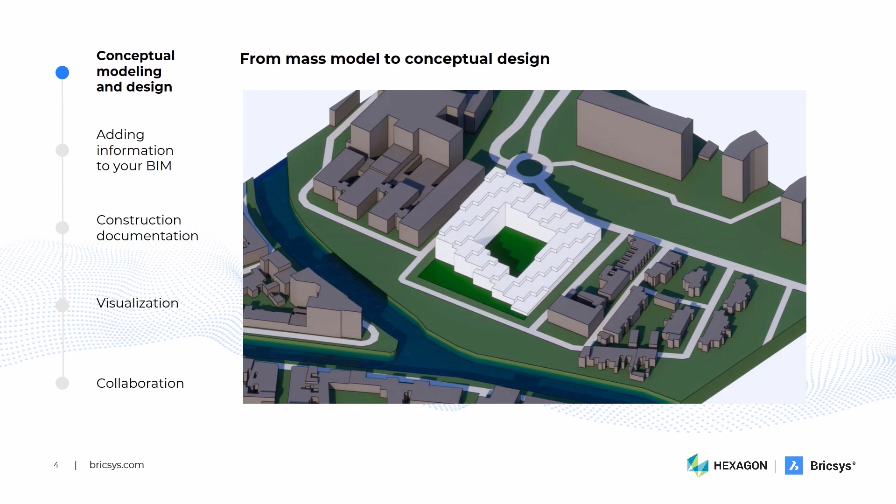In the first part of our presentation, we will explain how in BricsCAD BIM you start with sculpting your conceptual design. Conceptual design is where we convert our ideas into a massing model to help us understand the project from a 3D massing view. Unlike traditional BIM tools, you can use intuitive push-pull direct modeling combined with parametric modeling, which is not limited by predefined parts or libraries of components. As a result, you can experience design freedom in a full 3D BIM workflow that will feed immediately into the BIM later in the process.

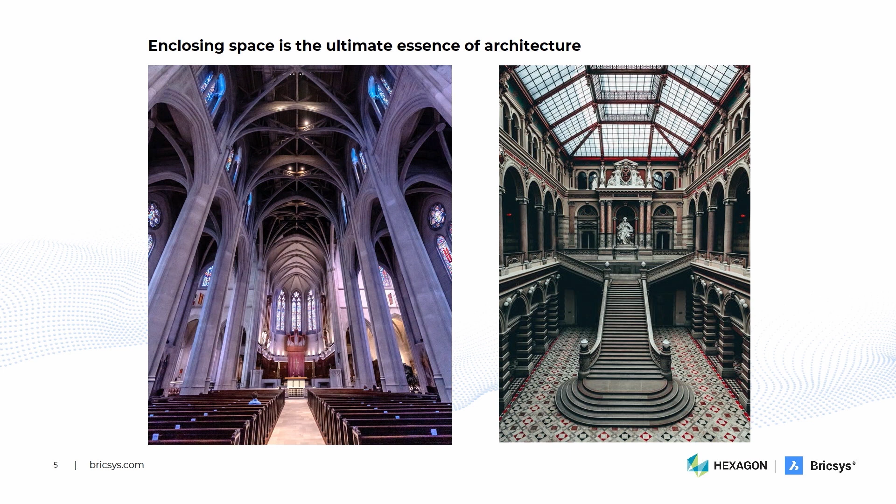An important aspect of the conceptual design are spaces. And let's hear from Miklos Svet, product manager at Bricsys, how you can work with spaces using a direct modeling approach. Thank you, Timon. Enclosing space is the ultimate essence of architecture. Many stakeholders associated with the building throughout its life cycle rely on spatial information. Architects, MEP engineers, contractors, and facility managers alike. Consequently, spaces must become the backbone of a new generation BIM software.

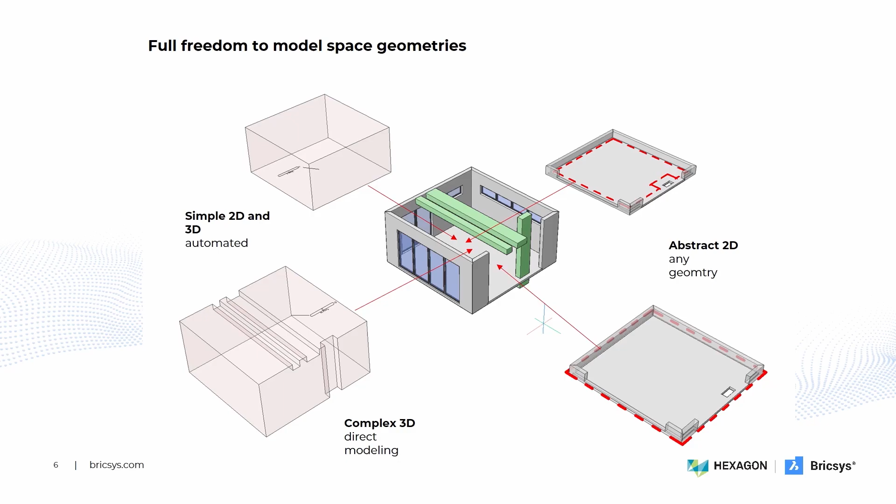At Bricsys, we believe that users of a software need to have unlimited freedom to model any spatial geometry, just like how they can model any building element. Therefore, our spaces can be simple 3D volumes or very complex ones, or even 2D abstractions. In addition to spaces, we also introduce story and building spatial elements in a hierarchical, IFC-compatible data structure. Spatial elements in BricsCAD BIM V21 feature many industry-first standout solutions. For example, generative building and spatial element authoring with the help of artificial intelligence, also known as quick building. Check it out. Thank you, Miklos.

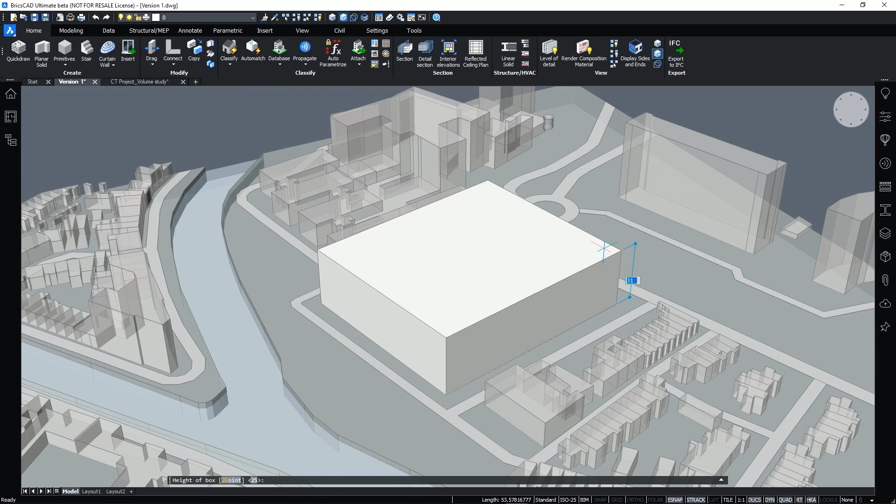Let's show what this massing workflow looks like. We can start sculpting 3D volumes to create the shape of the building that we have in mind. Jacob, can you explain to us how you create the initial shape of the building? Yeah, so here I'm basically starting from a very simple box and using direct modeling tools such as extrude, push-pull, or by rotating faces. I am able to sculpt my way to an interesting design that works well with the project context.

So here I am simply rotating faces, and I'm using the manipulator to help me with this process. Here I'm repeating the same process again to turn this model into a slightly more dynamic shape. Now, of course, next to direct modeling, it's also possible to use tools like, for example, scripting. Here I can use a Lisp routine that will slice this solid into equal cells in the X, Y, and Z direction.

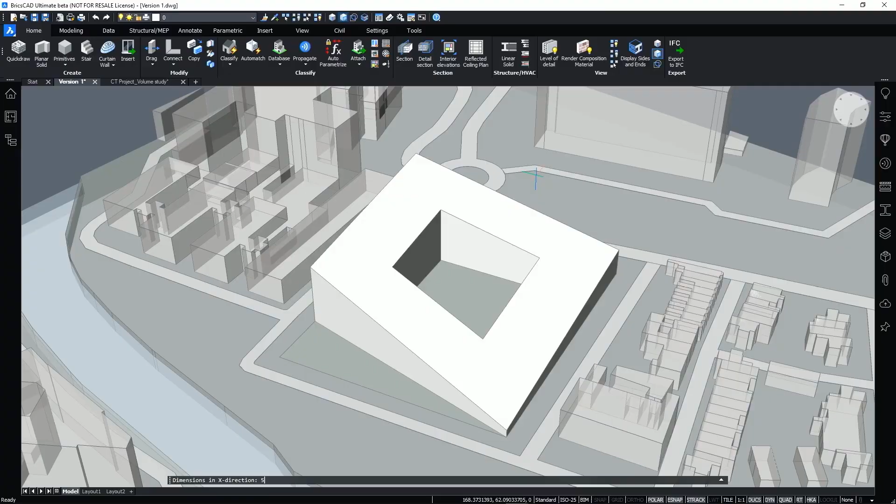And of course, there are different ways to achieve this massing model or to create different volume studies. For example, you can import the geometry of the 3D volume from another tool or use our Grasshopper connection to create it in a parametric way. In BricsCAD, you can work with native geometry or imported geometry in exactly the same way with no limitations.

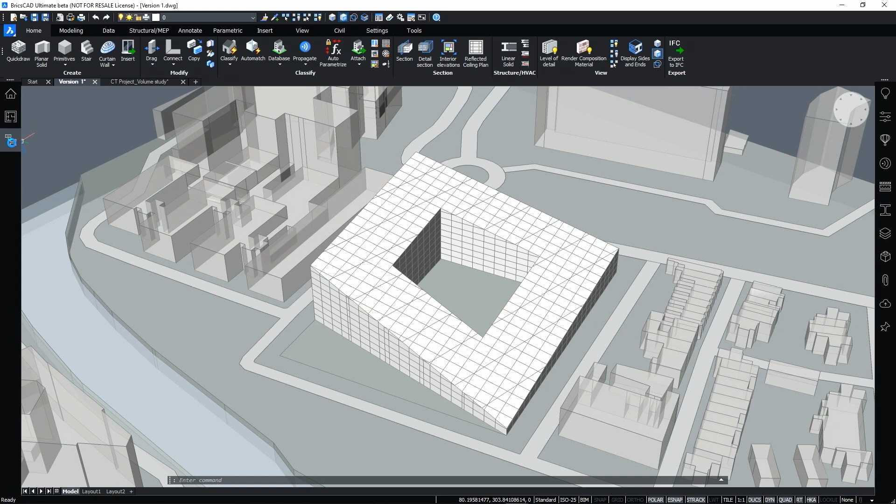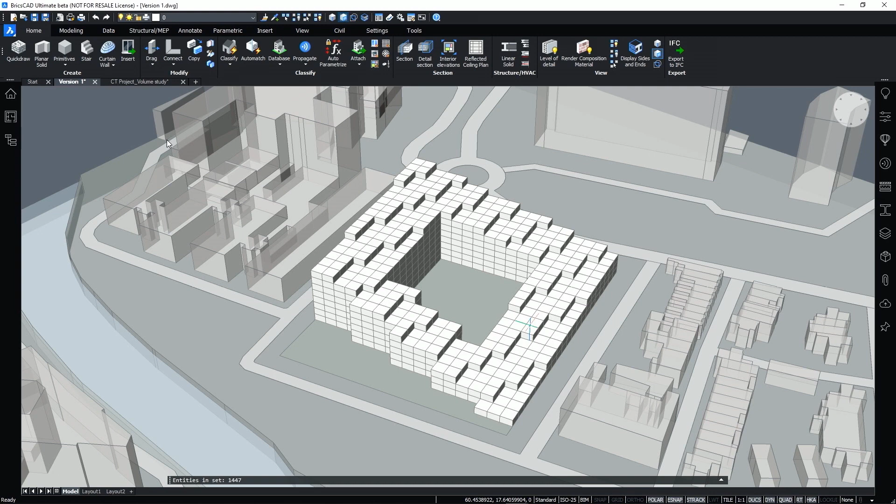We can now use the structure tree to see that the cells which are created by the slicing algorithm are sorted by volume. So we can remove the cells with the smallest volumes to get rid of the partially sliced cells to achieve the shape that we have in mind. In this way, you can quickly create multiple volume studies, as you can see from the alternatives in this DWG model. And now, let's show a first example of automation.

We're going to use a tool called Quick Building to transform our massing volume into an LOD200 model automatically. Quick Building will shell the mass volume, and it will automatically create walls, slabs, and spatial elements like spaces, buildings, and stories. We can create a section plane to have a look inside the building. And we can indeed see that instead of a mass model, we have created walls and slabs. We can also go to the structure tree and isolate some of the slabs to see how the model was created.

In this way, it is not only possible to compare design alternatives in a geometrical way, but also compare them using different derived quantities. As part of BricsCAD V21, we have introduced a new quantity framework that allows users to create configurable user-defined quantities. We have prepared some quantities up front, but of course it's also possible to create your own quantities using expressions like sum, max, or min.

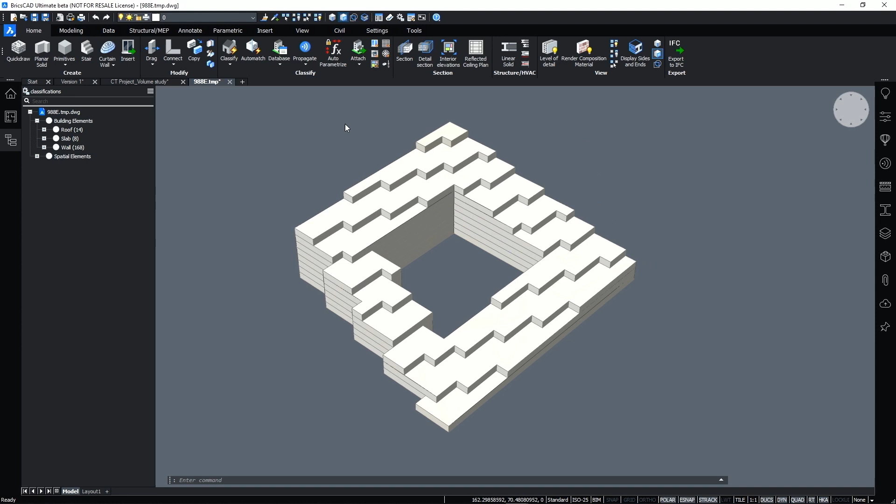In this case, we are going to create a quantity for the compactness of the building. This can be calculated using an expression that divides the volume over the total surface area of our building shape. These kind of quantities can now be used downstream in the process, for example, for quantity takeoff, IFC export, or you can see them in the properties panel here on the right.

What we have shown is a workflow to convert a mass model into a conceptual design model, with walls, slabs, and spatial elements. This can be used for evaluating design options, not only geometrically, but also with regards to quantities like compactness or floor-to-site ratio.

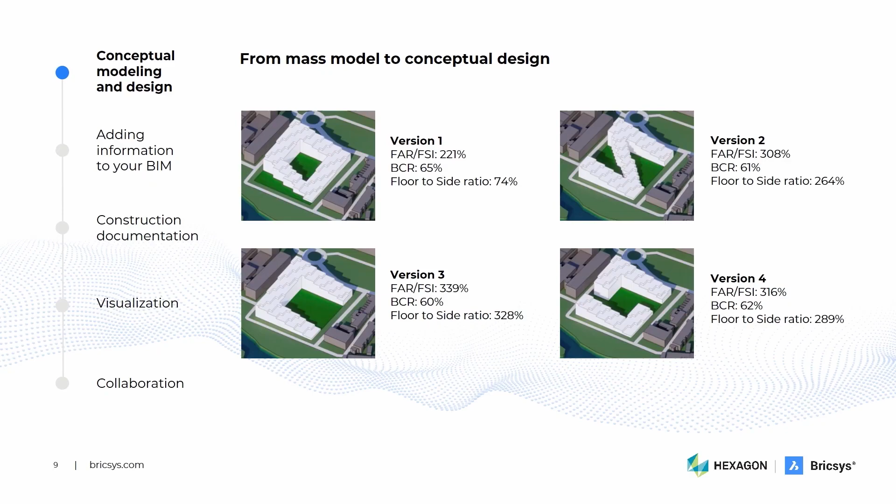In the next demo, we want to demonstrate a scan-to-BIM workflow, where you can create a conceptual design model starting from a scanned point cloud. This is often the case in a renovation context. Last year at the Bricsys conference, we announced a multi-year initiative to advance our scan-to-BIM technology in cooperation with our partners HOK and Leica Geosystems. Our partners from HOK have delivered industry guidance that is helping us to create a solution that is able to handle large reality capture projects. And let's see what this workflow looks like in BricsCAD V21.

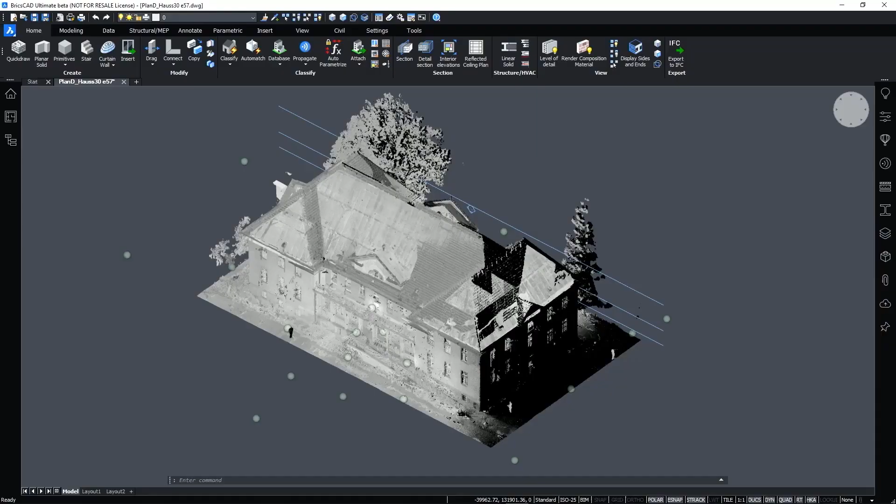We start here from an existing large point cloud of 98 gigabytes after processing of the point cloud. As you can see, the performance of this huge model is still very good. We can activate a section to have a look inside the point cloud, where we can see some of the bubbles. These bubbles are locations where the scan was taken. And we can click on such a bubble to see the exact scan that was taken from that position.

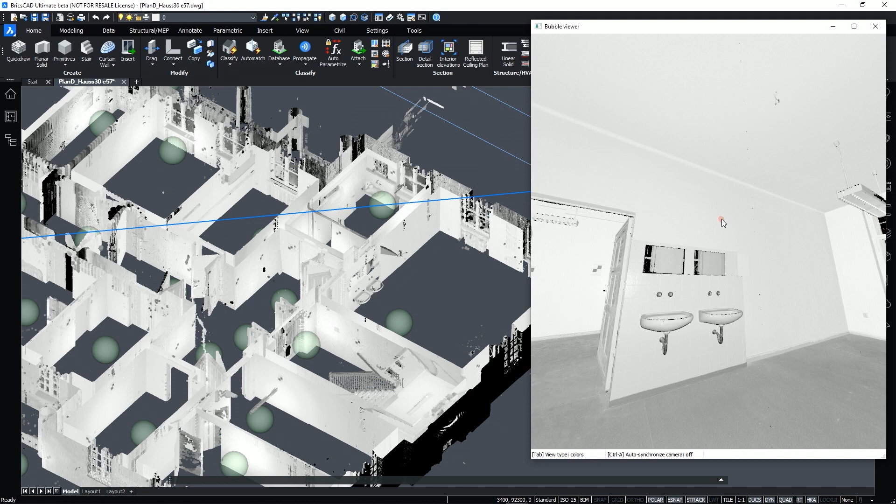From this bubble view, smart algorithms help the user to generate the 3D geometry she wants in one single click. And it also gives you feedback on deviations from the ideal model. Other algorithms later on can be used to straighten the model if needed. We can see that Jacob is now creating multiple planar surfaces to create the exact position of the room, which can then be used for further modeling. Afterwards, we can use our native direct modeling tools like BIM Connect to finish the geometry of this room.

Next to surfaces, it is also possible to detect solids, for example walls or slabs or columns, from the point cloud data. We can do this by choosing one point from where the solid should be created. What we are actually showing here is a semi-automatic workflow to create geometry from the point cloud that can be used later on to continue modeling or to convert them to intelligent BIM elements, as we will demonstrate in the next part of our presentation.

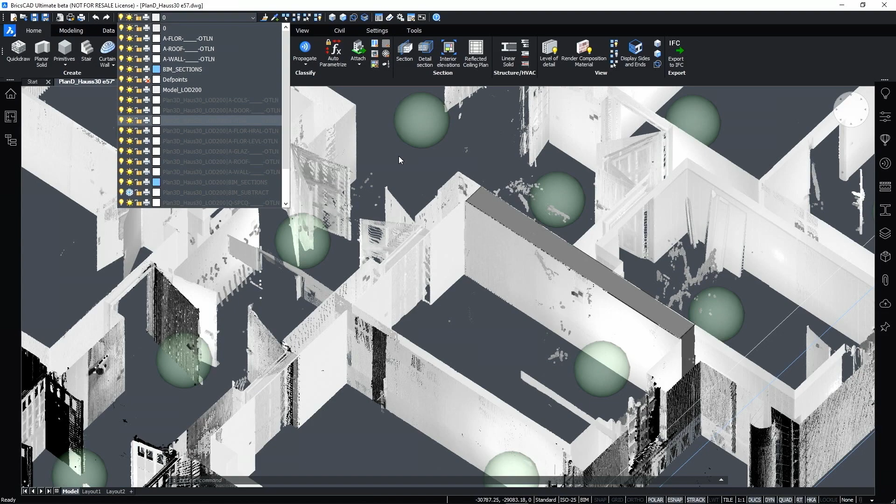In a similar way, we can continue to build the model until we have finished an LOD200 model of the scanned building. As a result, we have a hybrid model of the point cloud combined with the geometry in the same DWG file. In the next part of our presentation, we will develop our concept model into a full information-rich BIM. BricsCAD BIM leverages the power of artificial intelligence to automatically convert your concept study model to a fully classified BIM.

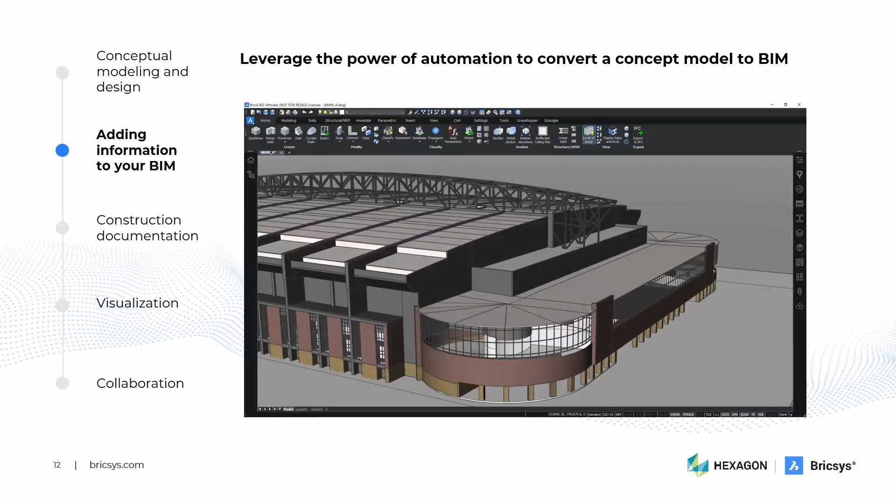Let's first hear from Greg Schleusner, a design technology director at HOK, how Bricsys works together with industry partners like HOK to advance our future roadmap. When we started working with Bricsys, we chose an existing project to reverse engineer, i.e., take a project we've already built, designed in other platforms, and rebuild that and use that as the basis of our work. So last year you saw the model reconstructed. This year you're going to see it used in demos.

One of the main areas we focused on was drawing automation, and specifically we started with something like fire life safety, which is a lot of effort. So you can see here these kind of drawings are really laborious to produce, and so that was the basis of the collaboration. We think this way of working is a perfect process to go back and forth, to use the work that we've already done, and help engage and add to the development of Bricsys.

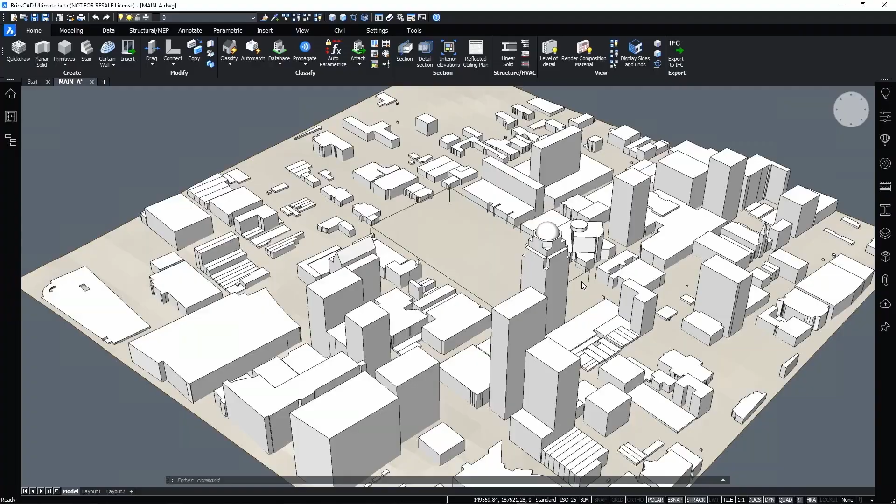The first and foremost challenge with working with this kind of large-scale projects is, of course, performance. Our strategy to handle big models is very simple and straightforward, namely to split it up into smaller parts. It is plain common sense. You don't want to wait until the last duct or sofa on the 20th floor is rendered to check something on the second floor. You just open that model as if the rest didn't exist.

Still, a large project remains a large project, and all these separate models are combined into one master model, which is often slow to open and handle when it contains a lot of large models. To address this, in BricsCAD V21, we have introduced background loading of XREFs. As you could see, we could open the large model in just a second, while all the nested submodels are being loaded in the background.

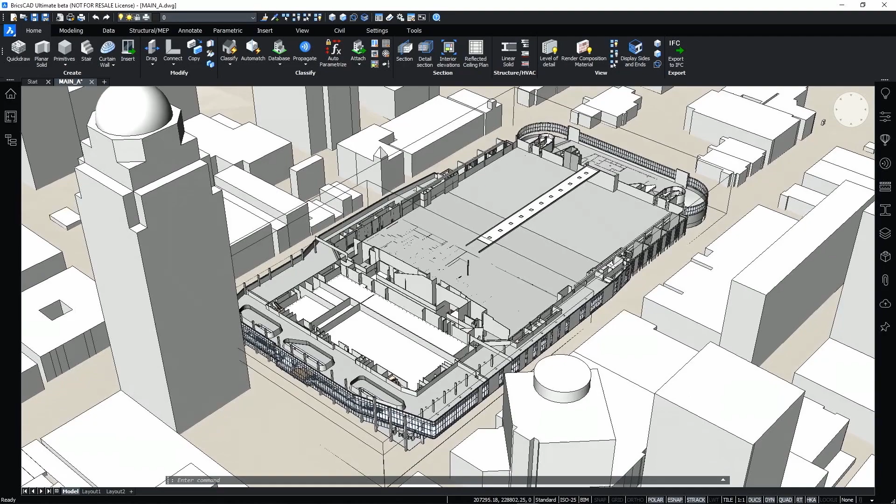Independent of the size and complexity of these XREFs, the master model opens instantly. The overall structure is displayed in low detail, while multiple processor cores are working in the background to load and render the XREFs in full detail. The XREFs show more detail as soon as it's ready, but before that you can already start inspecting data like the building and story information, or you can navigate through the project to that one XREF that you search for and open it up.

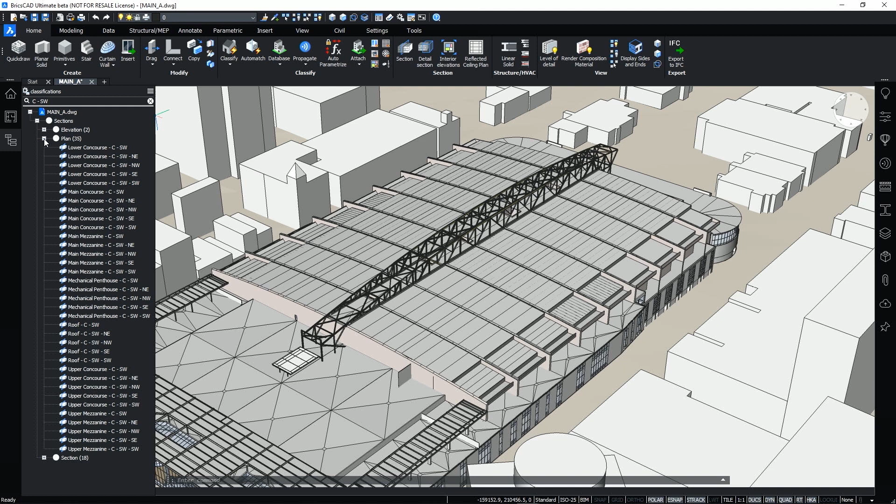Now that the entire model is ready, we will focus on a smaller part, namely the main mezzanine in the southwest part of the building, to show how we go from a geometric model to a BIM using our artificial intelligence tools. Let's open this model as a separate DWG file. If we open the structure tree in this model, we can see that it contains 515 solids. Now we want to convert these solids into information-rich BIM entities like walls and slabs and columns. This would be a lot of manual work, and this is where a new example of automation comes in.

BIMify is a tool to automatically classify these solids. It is based on machine learning algorithms that were trained on a large database of BIM models, and as such, BIMify is able to detect BIM types based on geometric attributes of the solids. BIMify will now start scanning the entire model to classify all the entities and also to detect buildings and stories and spaces. The goal here is that BIMify does the majority of the work, but as a designer, you can still overrule or change the classifications manually.

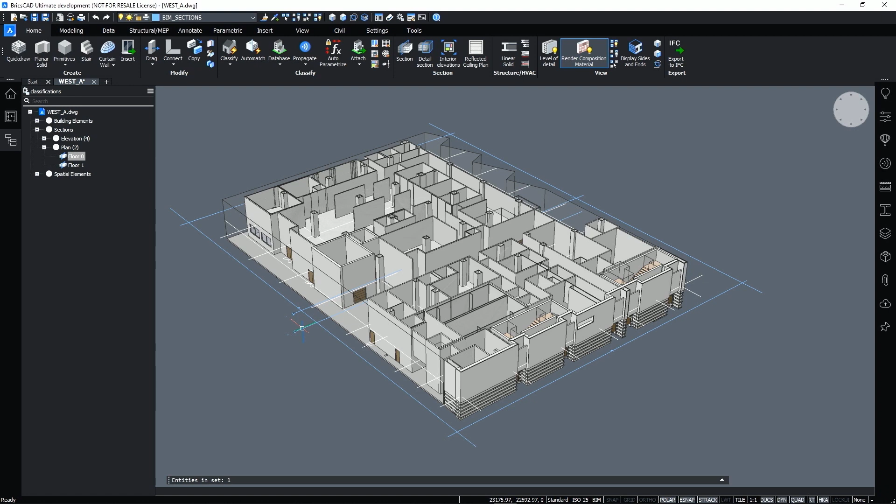For example, in the structure tree, we can see that there are building elements being classified. If we select them, we can see that, in fact, these are furnishing elements. So we can select these entities, we can go to the quad, and we can reclassify them as furnishing elements. Also from the structure tree, we can isolate, for example, the walls to see how the model is structured. And we can indeed see that BIMify has done a good job in classifying the walls.

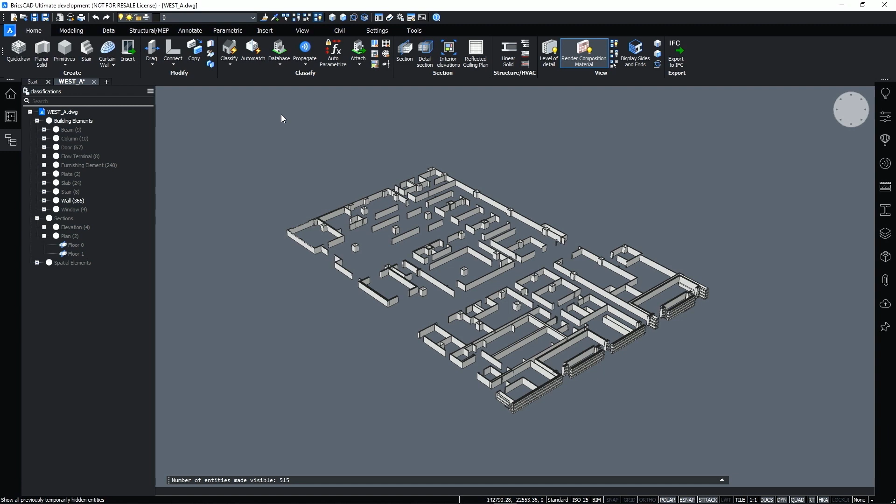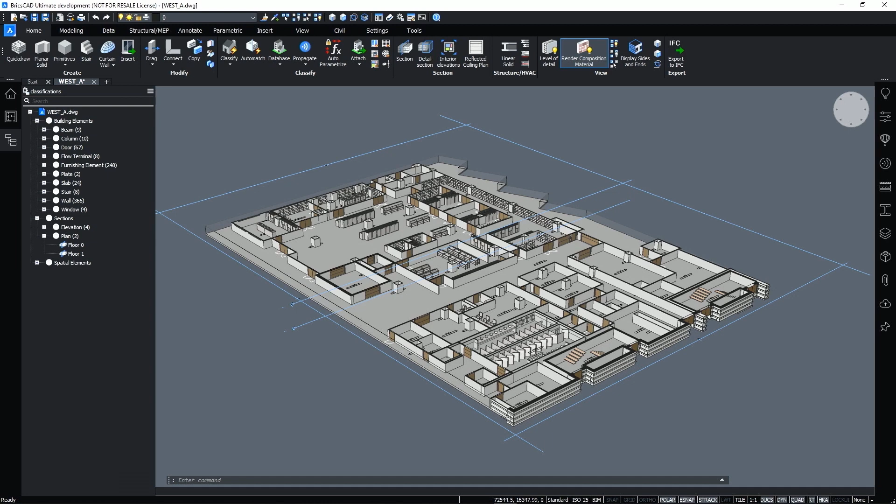Jakob, can you now explain to us how we can create and work with the new spaces in BricsCAD BIM V21? So other than classifying objects according to their IFC classifications, BIMify also automatically created spaces in the model. So it automatically found all of the enclosed spaces, enclosed by architectural elements such as walls, slabs, columns, and created space objects for these. So you can see this here in the structure browser. I have here my spatial elements.

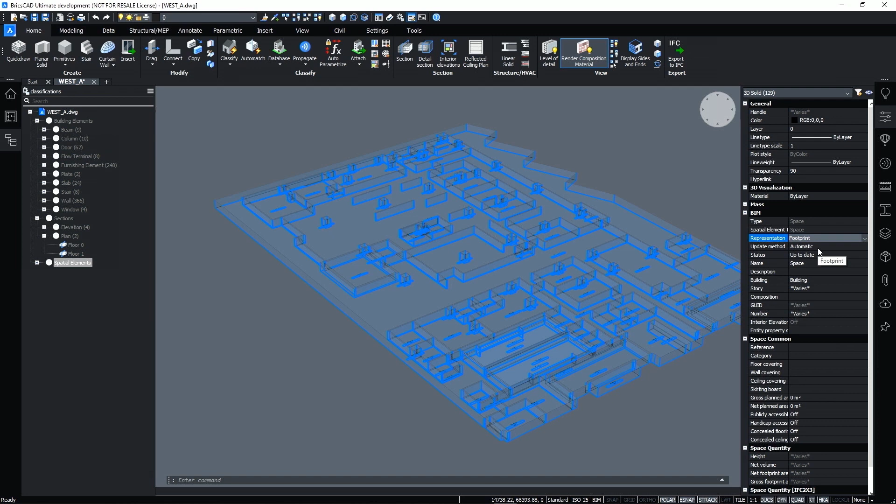Let me just isolate them. And you'll see that they're actually solid objects. So they're represented by solids. I can also represent them by, for example, footprints. So let me change their representation to footprint. This way, your model will be a bit less cluttered, and you can get a very clear overview of where the spaces in your model are.

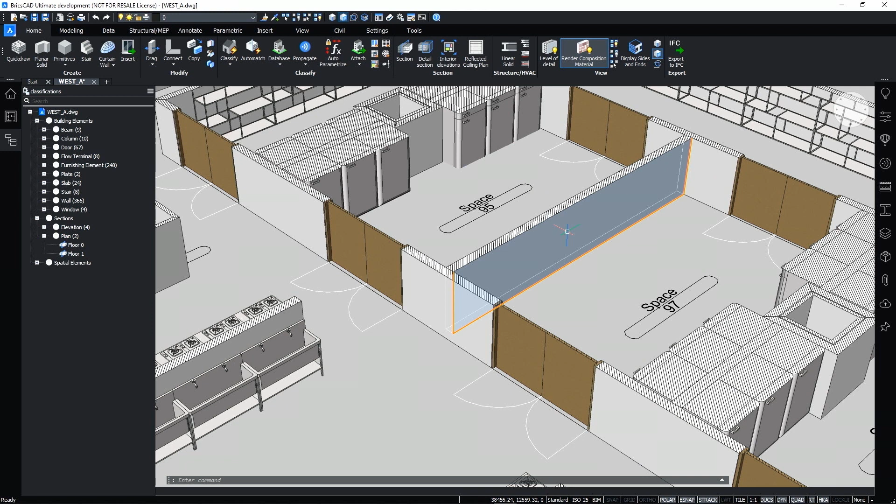Of course, these spaces are also still linked to their enclosing entities, which means that, for example, if I would move a wall, let's say I move this wall here, you will notice as soon as I complete this operation that my two adjacent spaces here will be flagged as out of date. So you see this little exclamation mark. I can simply choose to update it automatically, and it will adapt to the new situation.

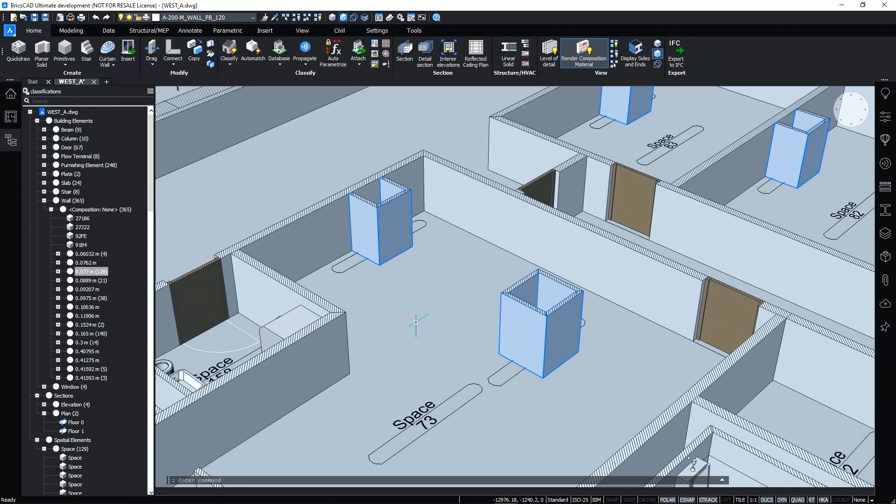In order to increase the level of development of this model further, we can also start adding compositions to the walls and the slabs. For example, in this model, we can see several coverings for the structural columns. These coverings can serve as a fire casing. From the classifications tree, we can easily select all the coverings, and we can apply a composition by drag and drop from the composition panel.

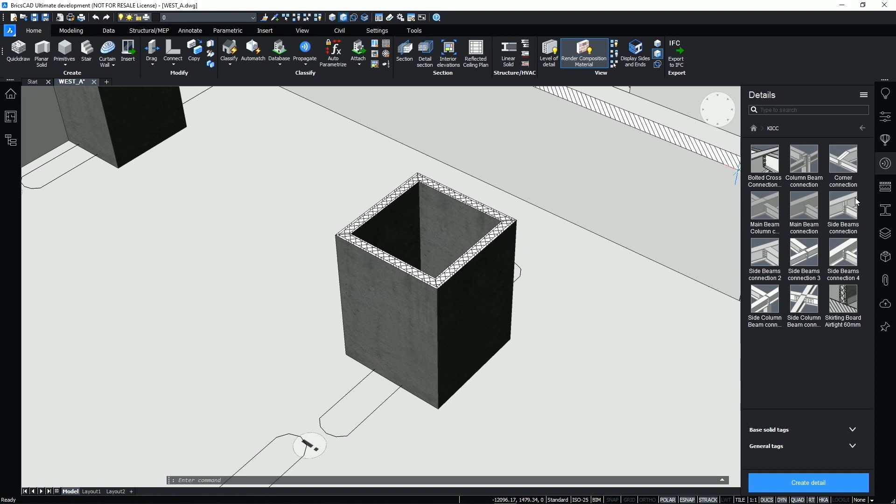After this is done, we can increase the LOD even more by applying details from our detail library. In this case, we want to apply a skirting board detail to the column coverings. This will improve the airtightness, but also serve as a protection for heavy objects. We can do this by drag and drop of the detail, and this will propagate the detail throughout the model.

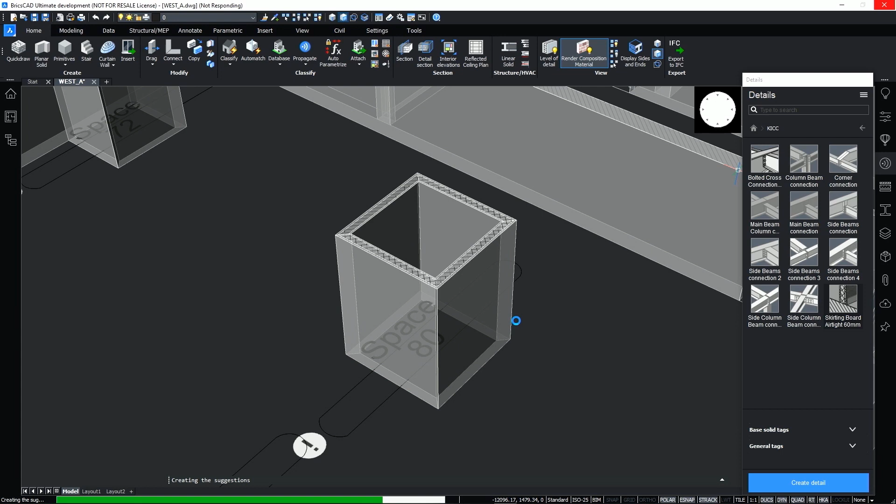This means that it will scan and find all possible applications of a detail in the entire model by trying to find the exact same situations in the model where this detail can be applied. This saves you a lot of time, and it allows you to increase the level of development in the model consistently, not only in one single place.

In this case, 128 applications were found, and we can manually select the indicators to choose whether to keep or ignore these details. So as a designer, you still have full control. If we accept the changes, the geometric applications are applied directly to the solids in all the detected places.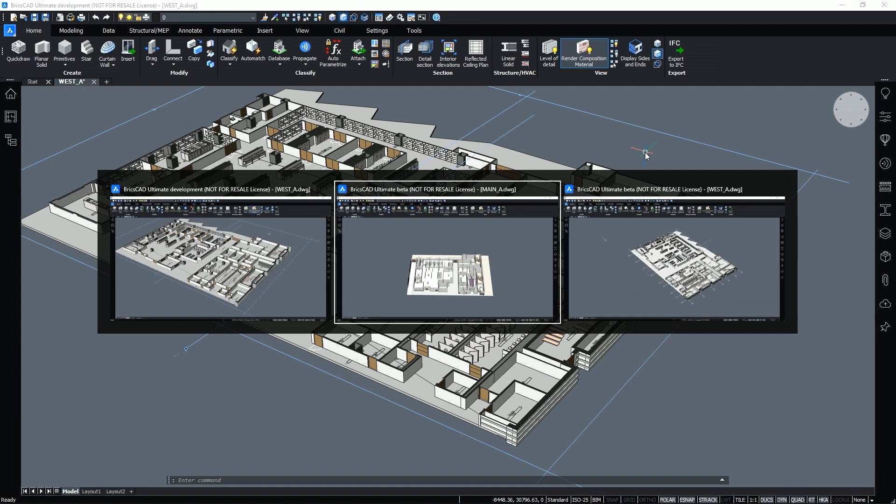As a next step of automation, it is possible to use scripting in Python, which has a very high-level and intuitive syntax for usage in BIM, without needing a lot of development background. For example, in this model, we are interested to see some key numbers about the model, like the occupancy of the rooms or the different areas of the different types of rooms. Using Python scripting, we can easily visualize this data using one of the many Python libraries that are available.

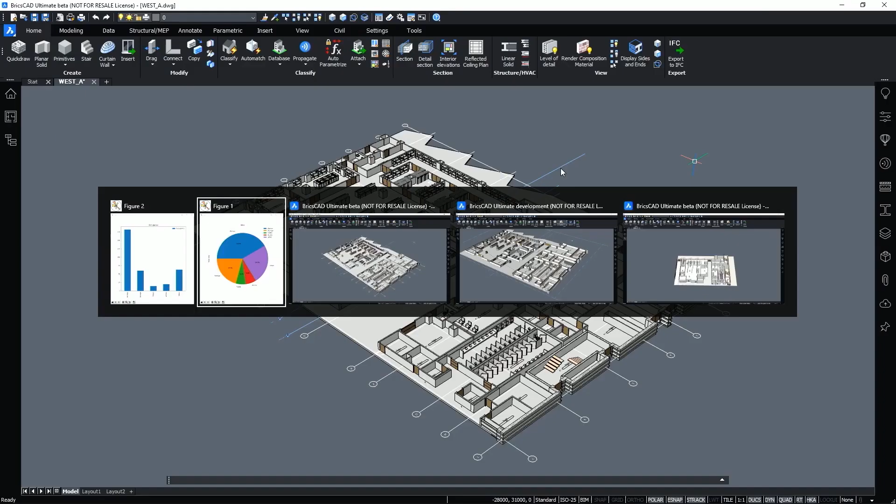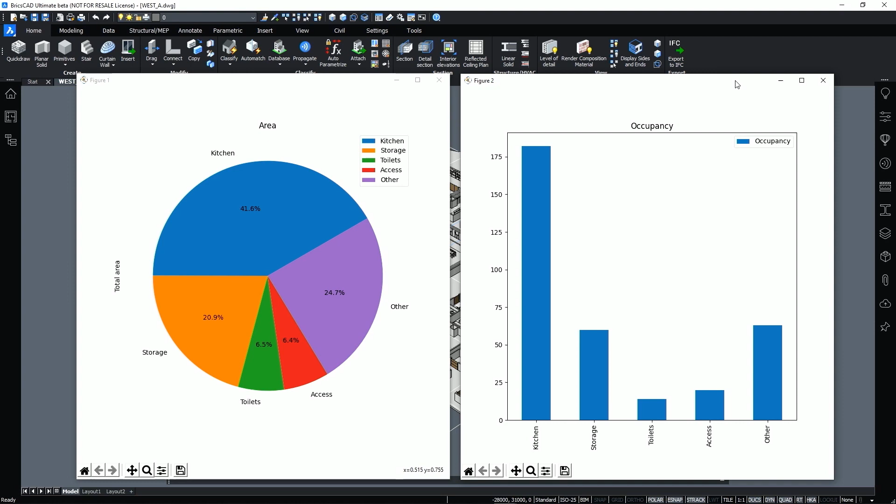For example, here we can see the results of the area and the occupancy analysis shown in real time from the BIM session, which gives us a lot of insights into how the model works. In this demo, we used a lot of artificial intelligence to automate tedious parts in the BIM workflow. Jürgen, who's a technical lead at the AI and R&D team, will now explain the vision for using artificial intelligence in BIM. Jürgen? Thank you, Tim.

You could say that about 80% of the time spent on a BIM project goes to labor-intensive, repetitive work, while only 20% is spent on actual design work. Think about all the BIM data that needs to be added to the model, about recreating details over and over again, and about annotating and perfecting all generated drawings. That is why our team focuses on the creation of intelligent design assistance tools that automate these repetitive tasks and give more time to the architect or designer to focus on what really matters, the design and the problem solving.

We've already released a number of solutions that assist in creating a BIM model. You just saw examples of Quickdraw, of BIMify and Propagate, but we also see opportunities for other improvements. Drawing generation, for instance, is something that typically still takes a lot of manual work to get exactly right. And another interesting idea is the automatic checking of design requirements on your models. And of course, if you have one particularly hated bottleneck in your workflows, you can always let us know, and then we'll have a look at it.

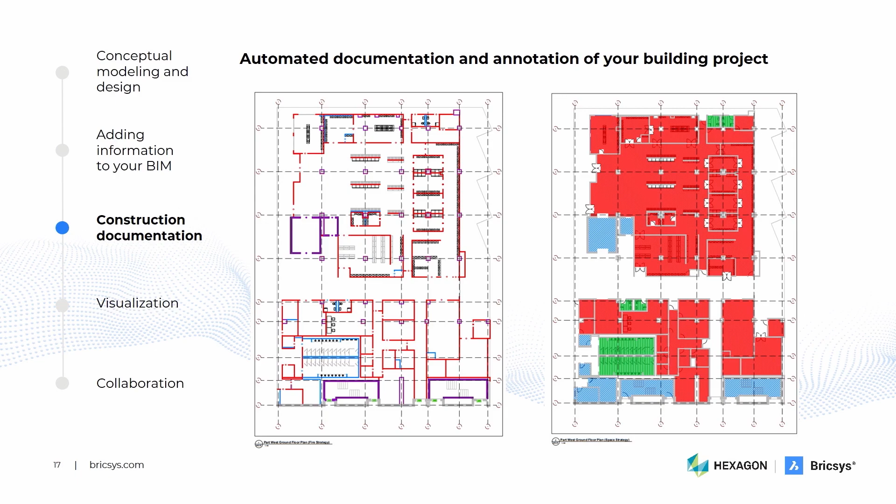The next step in our workflow is to create the construction drawings that are incorporated in the tender documentation and the contract documents for construction works. Creating the documentation for a building project is often the most laborious and error-prone part of the architect's building design workflow.

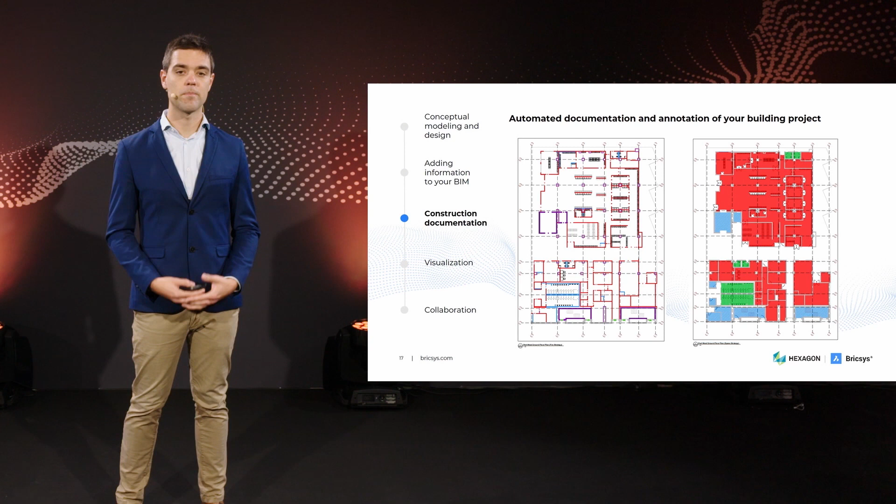Our goal is to create clear and accurate construction documentation and give the user complete control on how the 2D drawings will look, including automation of tag placements and drawing customizations. Then, these automatically created sheets can be freely annotated and dimensioned using the 2D drafting tools that are available natively in DWG, while the drawing views stay in sync with the 3D model.

Peter, a product manager at Bricsys, will now explain how the project browser can be used to create and manage your construction documents. Peter? In BricsCAD BIM, the center of everything is a 3D model, created and manipulated using direct modeling. So the BIM is not built up from floor plans and elevations, but it is the other way around.

The 2D is generated from 3D by calculating cross-sections and hidden line removal through the 3D objects. The resulting 2D line models are stored in separate DWG files, which can be edited using the standard toolkit for 2D drafting. And they are grouped using sheet sets.

With the BricsCAD BIM project browser, in a couple clicks you can create a sheet set filled with hundreds of sheets, all using your company standard title blocks, page setups, plotter configurations, and naming convention. Floor plans, sections, elevations, and details are automatically laid out on the sheets.

You can even create multiple sheet sets for different phases in the project or for different drawing representation types. Adding more sheets to your project will not make the 3D model or any of the individual sheets bigger or slower to open up or handle. Let's have a look how that works.

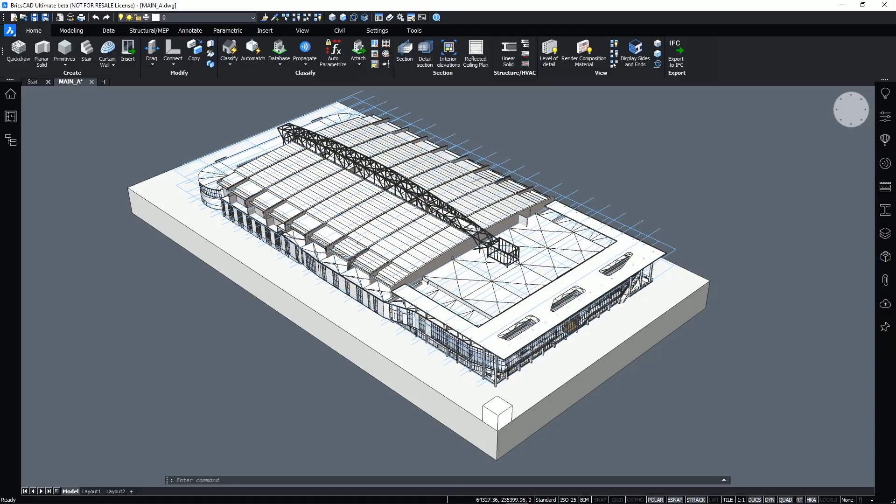Thank you. So we start here from the master model of the Kentucky Convention Center. To generate the plans of this large building, section volumes were made that represent only a smaller portion of the model. These section volumes cut through different XREFs of the master and can be used both for checking the 3D model, but they are also the basis to generate the construction documents.

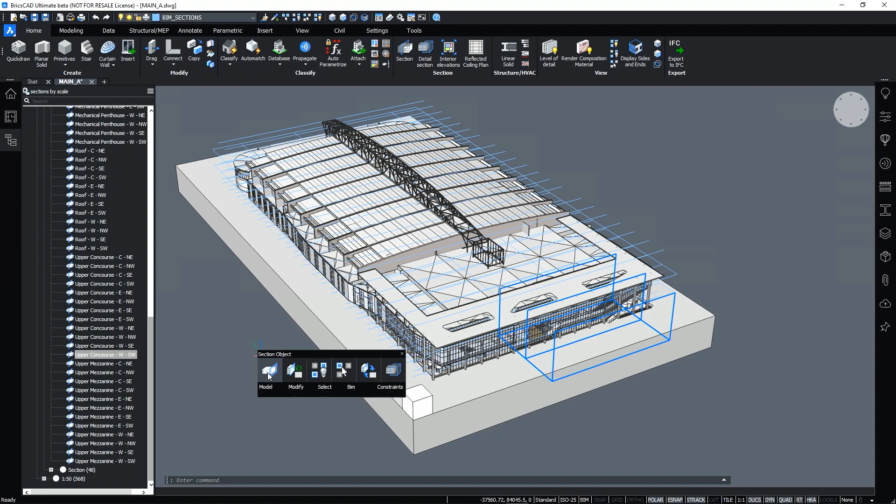Elevations and vertical sections were constructed in a similar manner, and as a result, the entire model contains more than 700 section volumes. Let's isolate one section volume that we will work on. As Peter explained to us before, the 2D views are stored in separate drawings linked to the model, which we can open from the project browser.

The project browser gives us a full overview of all the sections and sheets and models that are part of the BIM project. From here, we can open a sheet that was generated up front to show what it looks like, including view labels, title blocks, and grids. A large set of sections still needs to be placed on the sheets here.

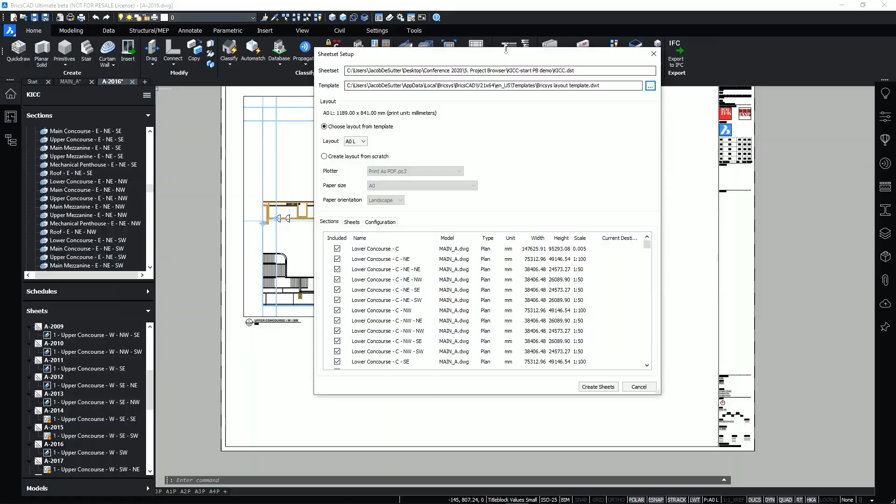So Jacob will now show us how you can configure the sheet set layout to create all the sheets that we need for the construction documents. So in the sheet set setup, we can navigate through all of the supporting sections, schedules, and sheets in our project. In the Sheets tab here, we can find previews of the sheets to be created, including some placeholder viewports to know where the views will be placed exactly.

If I scroll down here, I can see that there's a couple of sheets with detail views. And in this case, there's way too many views on this sheet. So what I can do is go to the configuration tab here and just change the margin in between my drawings or my views. So we have a more nicely laid out view here.

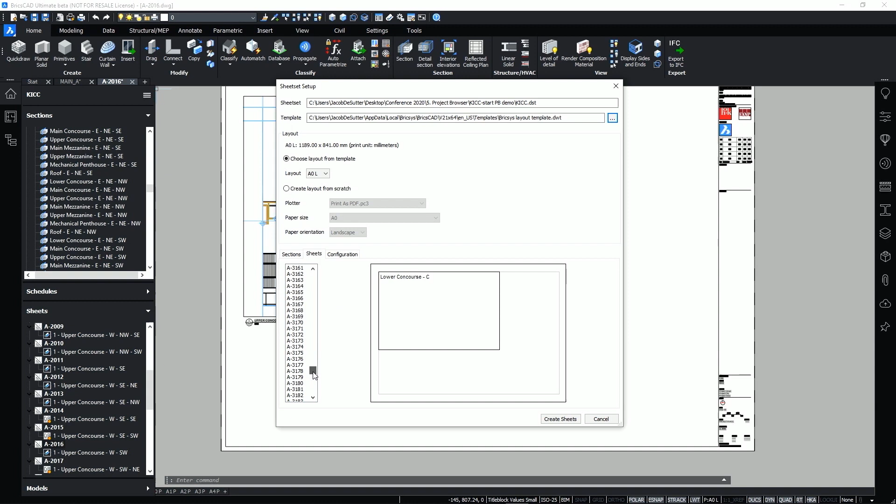Now we can see the spacing is way better in between these views, and also automatically more sheets were created in order to fit all of the views. Okay, so let's create the sheets here.

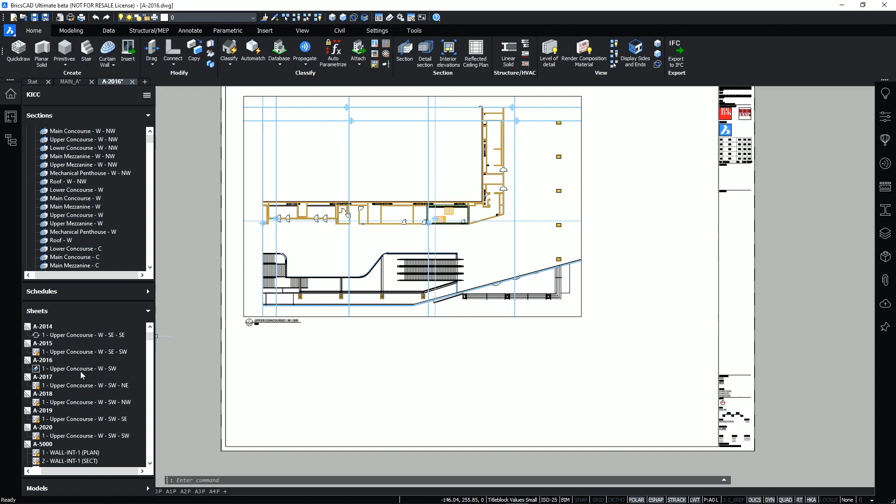Thank you. So this workflow allows you to work with hundreds of sheets at the same time and control completely what they look like. As soon as the sheets are created, they will start updating in the background. While the sheets are updating in the background process, we can continue working. For example, we can start annotating this drawing.

In the first place, we can start adding some composition tags. Composition tags show you the different layers of the wall compositions or slab compositions that you have used for these specific entities. Of course, these tags are also completely customizable according to your company or drawing standards. Secondly, we can also add some spot elevation levels. Spot elevations show you the finished floor level of the entities that are being tagged.

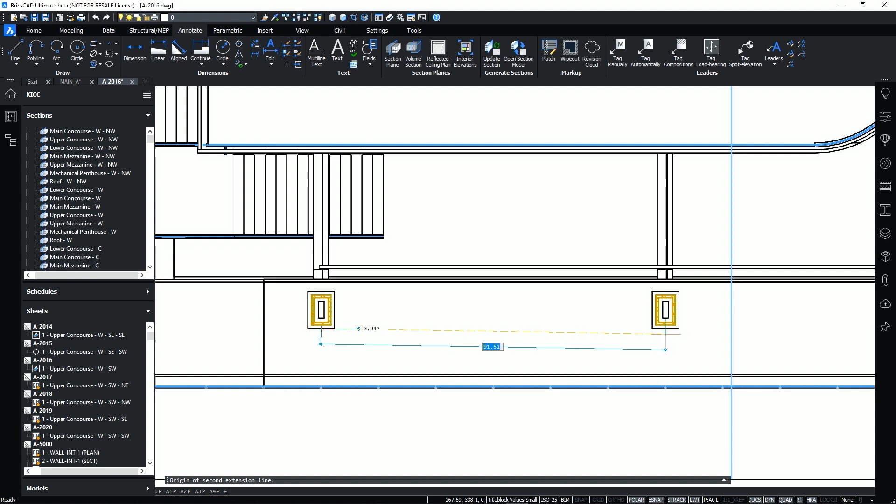Finally, we can also start adding some dimensions. We can do that using the 2D drafting tools that are available natively in DWG. As a designer, you have access to a large 2D drafting toolset to finish the construction drawings as you like, while we make sure that all your work is kept in sync with the 3D model.

So let's now focus on the customization of the 2D drawings, and Jürgen will explain the idea and goal of the new drawing customization framework in V21. Jürgen, can you please explain it? Yeah, sure. So typically in larger projects, you'll have several 2D drawings all derived from the same 3D model. You'll have construction drawings, structural views, fire and safety documentation, etc.

In order to avoid a lot of manual work when creating all these drawings, we developed drawing customizations. Those are a kind of templates that you create once and then reuse in all your projects. And in one such template, you can specify which entity in the 3D model gets which appearance on a certain type of 2D drawing.

For that, you can create rules that filter out a certain BIM entity in the model based on any set of properties it may have, and then you can deeply customize how that entity is drawn on the sheet. In the end, this means that a lot of manual touch-ups to your drawings are no longer needed, and that a lot of potential errors in the process are avoided as well.

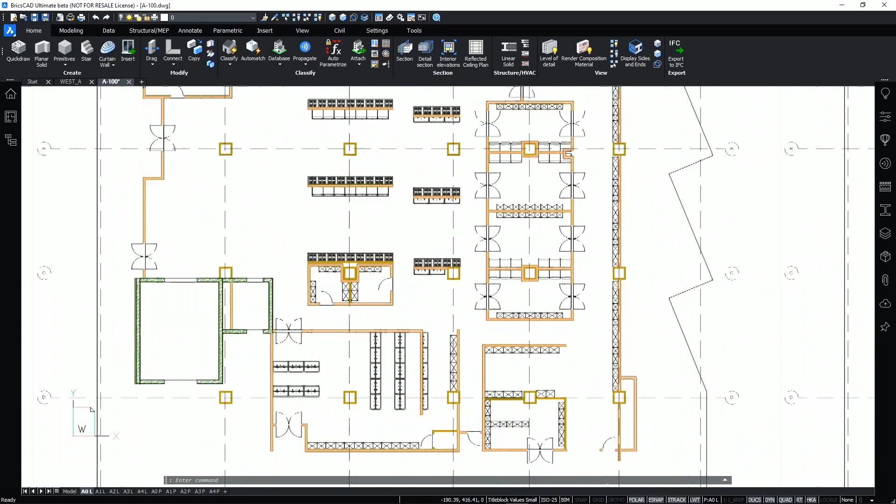Thank you. In this demo, we start from a sheet with two viewports of the same section result. The end goal is to create two types of customized plans, namely a life and fire safety plan and a space area plan. And we will do that using the drawing customizations as explained by Jürgen. Drawing customizations are closely linked to properties in the BIM, so we first go to the 3D model view.

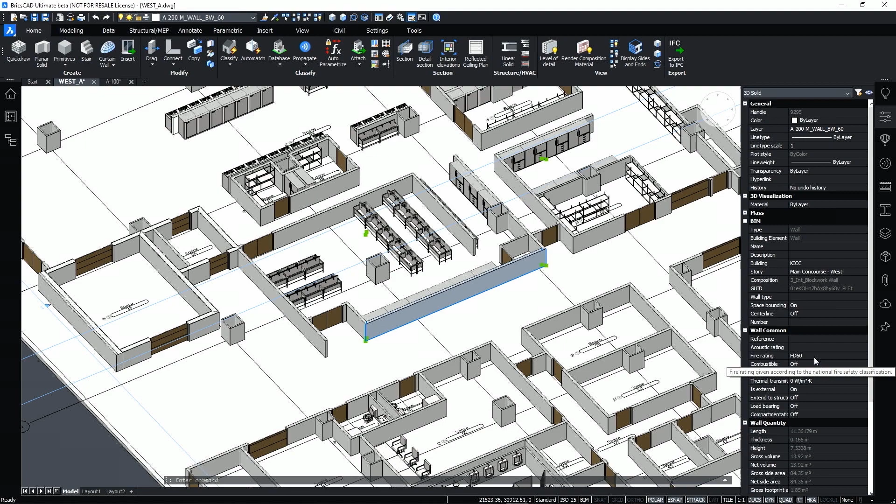In the BIM, we have added information about fire safety properties. For example, if we select one of the walls, we can see in the properties panel that this wall has a fire rating of 1 hour. We can also go to the structure tree to show that the model is organized by fire rating. So we can see some walls with a fire rating of half an hour, 1 hour, and 2 hours. Depending on this fire safety property, we want to give the walls a different representation on the floor plans.

In order to do that, the first step is to define the actual style definition. The style definition will define what the different types of lines will look like. For example, for walls with a 1 hour fire rating, we want to show the intersection fill in a red color. We can also control all the other line types here, of course.

Secondly, we don't just want to override what the walls will look like, but also we want to change how components like doors show up on the floor plans. For example, on our plan, we want to indicate automatically operated doors using a special tag. We can choose specific symbols, like this AOD tag, to show up on our floor plans, and they can be specified in an external DWG file.

The third step is to define the rules that map the properties to the specific style definition. For example, here we can see some of the rules that were created to map the walls and the doors to the customizations. Once all of this is ready, we can start adding these customizations to our viewports. For example, for this viewport, we will apply the life and fire safety customization.

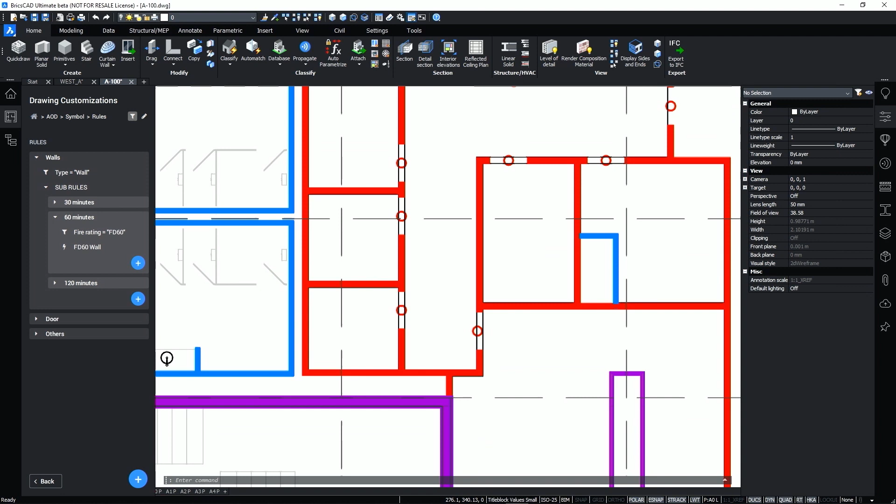So if we have a look at the customized viewport, we can see that the colors of the walls are now according to the fire safety property. Also, when we look at the doors, we can see the automatically operated doors being tagged in a specific way.

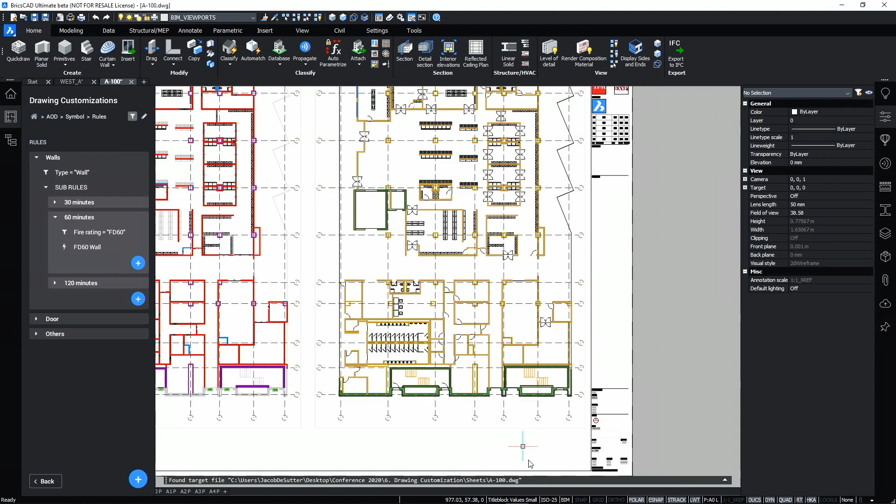We also want to show you a second example of drawing customizations. We are going to start from the same floor plan, and we are going to add a second customization file which we prepared up front. In this case, we will colorize the spaces according to the function in the BIM. For example, kitchen, storage, or toilet. But basically, any property can be used here to customize the look of your 2D drawings, as this is a completely generic framework.

One of the advantages is that the definition of customizations are external to the content. So you can use these customizations on different kinds of geometry, for example, imported geometry from Rhino, IFC, or native geometry. So you can create customizations based on company-wide standards and reuse them in different projects to make sure that all

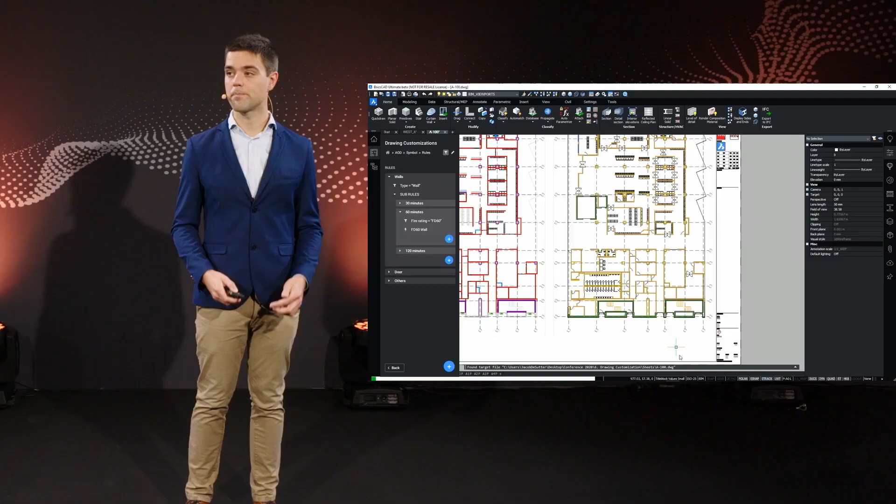your drawings are consistent. So here we can see that the spaces have a dedicated color according to the function of the space, but also the walls are customized and have a different look and feel. So this floor plan now looks quite structured and easy to read.

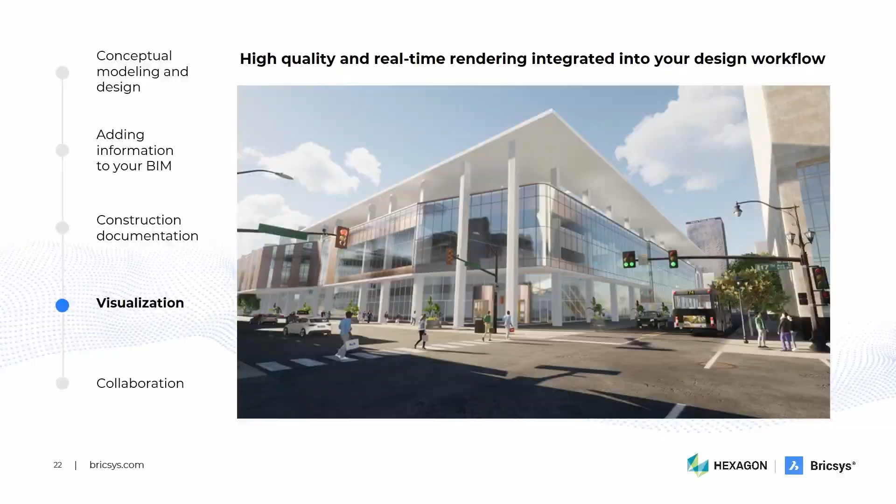In the fourth part of this presentation, we focus on visualization. As an architect, you probably want to showcase your first design steps to your client. Last year, we announced a partnership with Enscape for real-time, high-quality rendering as part of the Bricsys Collective. This year, we are very proud to introduce a new member of the Bricsys Collective, Twinmotion, developed by Unreal. Let's hear from Belinda Erkan, a product marketing manager at Twinmotion, who will talk about the value that this new integration can add to our customers.

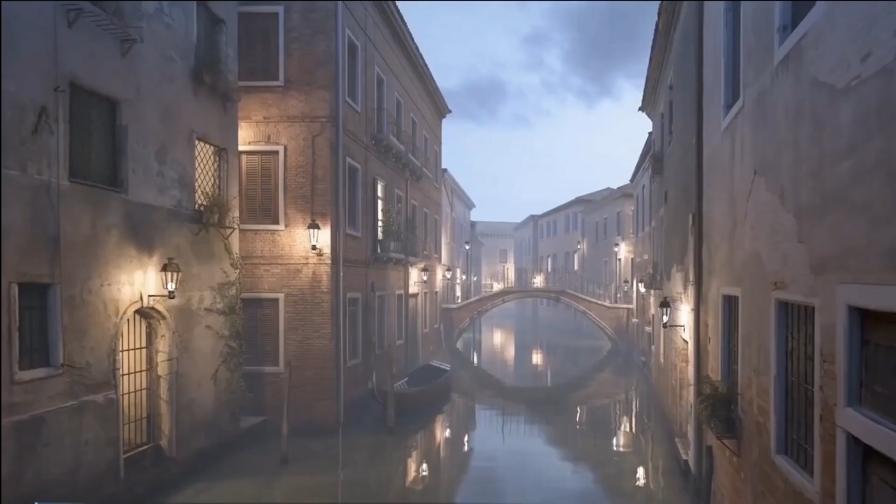This partnership is going to bring the whole range of Twinmotion's real-time capabilities to all BricsCAD users. Twinmotion is part of Epic Games, the developer of the Unreal Engine, and Epic Games brings a wealth of knowledge and history within the real-time technology space, where we have been pioneering and continuously driving real-time technology advancements through the engine. So we are very excited to help leverage the power of BricsCAD's unique and smart feature set, with Twinmotion enhancing the architectural design pipeline.

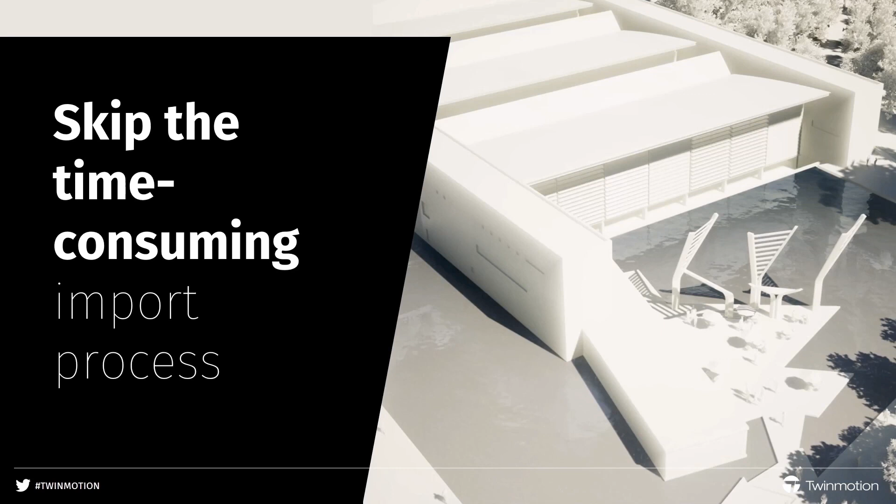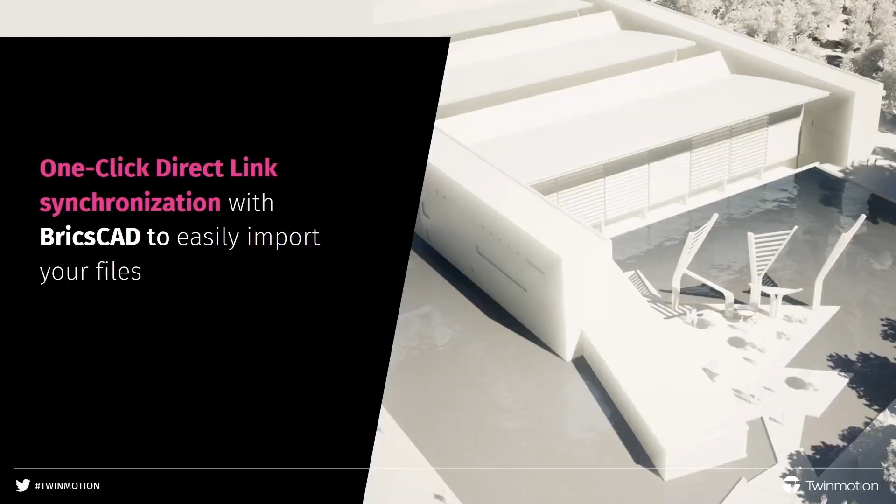And one of the essential core features of Twinmotion is that you can skip the time-consuming import and export process, because with Twinmotion you can really rapidly bring CAD data or your BIM data over to Twinmotion through the one-click direct link synchronization, which will be a plugin inside BricsCAD, and it will enable you to easily import your files into Twinmotion directly.

And then once you're inside Twinmotion, it's easy to learn and use, because Twinmotion was designed this way. It was designed to be simple and easy to use by combining this intuitive icon-driven interface and drag and drop assets. You have these beautiful one-click workflows, so you'll be able to get started quite quickly and be productive right out of the box. So overall, it's a very intuitive experience, and BricsCAD users can be excited about all these new ways of visualizing your data with Twinmotion, having the Unreal Engine as the underlying technology. You can create beautiful visualizations and animations with a really smooth user experience. So thank you very much, and we are looking forward to seeing you create such compelling stories.

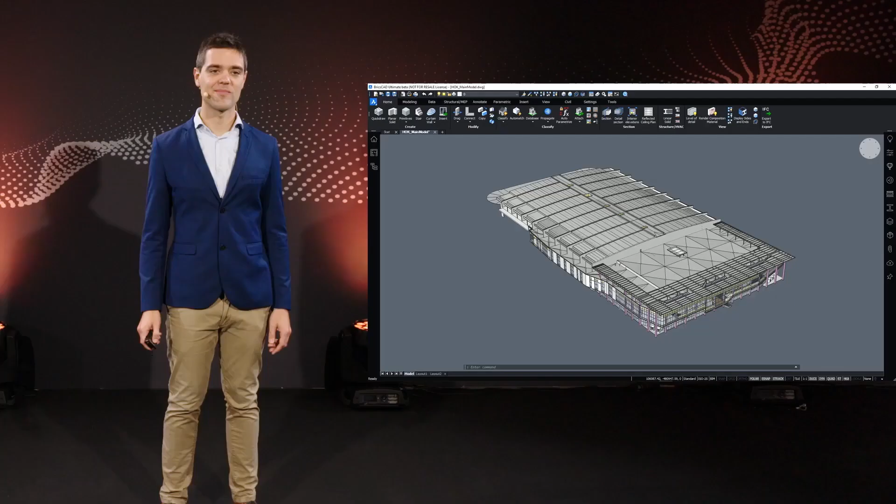Thank you, Belinda. We start here from the model that was created in BricsCAD BIM, and we will export the master model as a single file with all XREFs included. We will do that using the Datasmith file format. Datasmith is the most state-of-the-art format used to exchange data between all kinds of applications and Twinmotion. Jakob will now show how to create renders and animations in Twinmotion, starting from an imported Datasmith file.

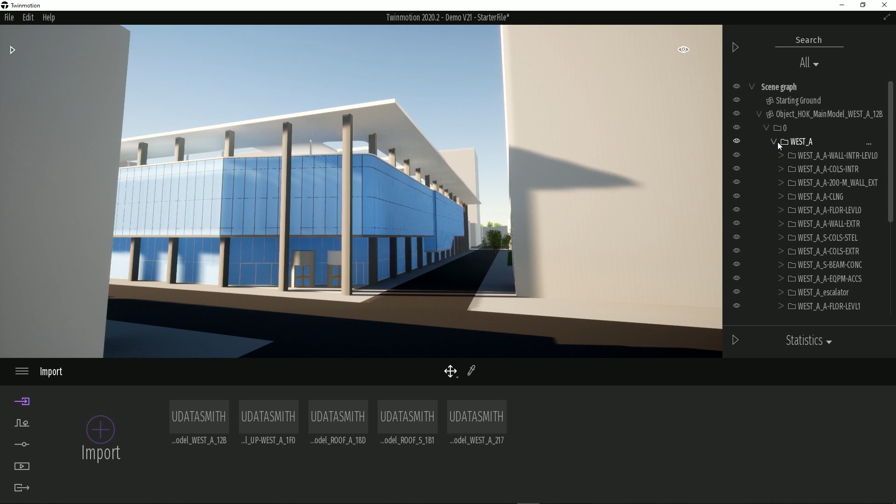So when importing the Datasmith files into Twinmotion, you will notice the same structure as in BricsCAD BIM will be used here as well. So you can find the same XREF names, the same layer structure, and also the same classification types such as walls and slabs. So it makes it very easy to navigate through your model that you already know from BricsCAD BIM.

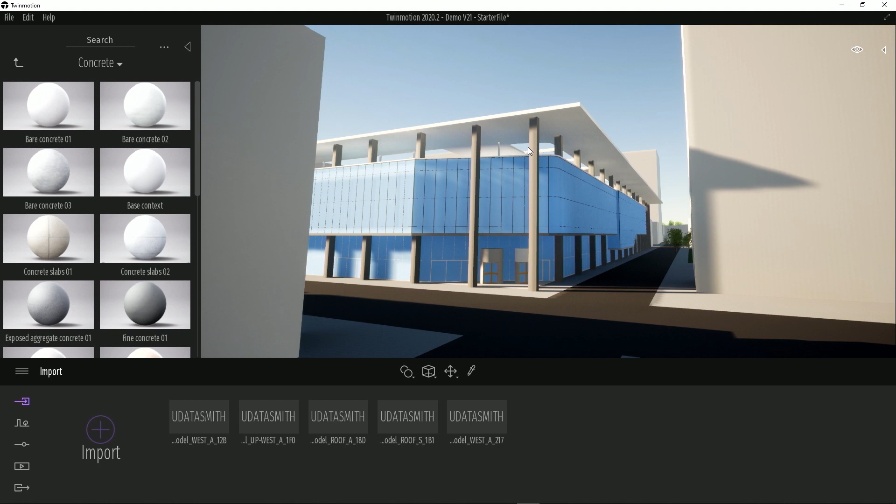Twinmotion comes with a big library of textures and assets, which are actually very easy to apply. So for instance, I can very easily drag and drop a concrete material onto these columns, and you will see that they all get the same texture at the same time. Same can be done for glass, for instance. I can simply drag and drop this glass texture on this model, which makes it already look more realistic.

Finally, it's also possible to add assets such as trees or other vegetation into my model. Let's now look at some animations and renders that we made with Twinmotion.

In the final part of our presentation, we will focus on collaboration. Of course, BIM is not just about working in isolation. It's about creating, sharing, and collaborating with project partners across the globe. So we need to make sure that everyone can work together regardless of their design platform.

In BricsCAD BIM, we enable this collaboration through the use of open standards like IFC and BCF, which is the preferred way of exchanging BIM information. As a complementary workflow, we also offer different interoperability possibilities with other BIM authoring tools, like the Rhino Grasshopper connection for generative design, and now in V21 also with Revit through RFA and RVT import.

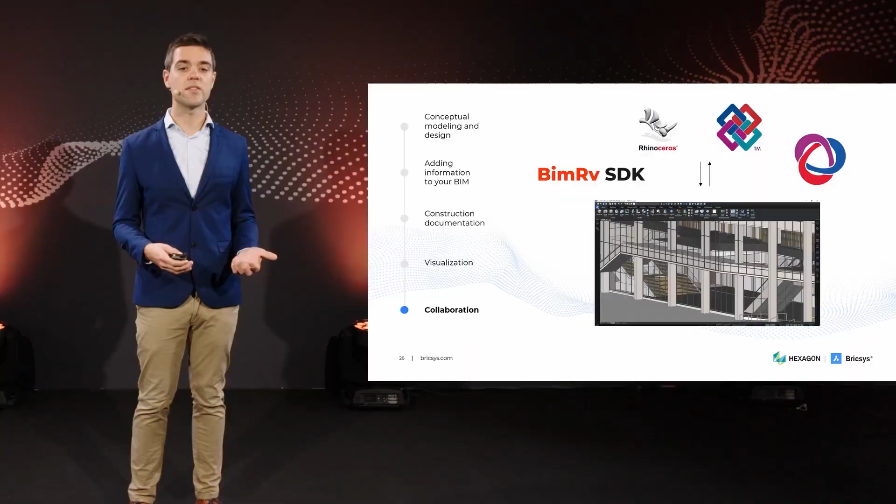Ruben, who's a BIM product specialist at Bricsys, will explain how we work together with buildingSMART International to increase adoption of open standards in the AEC industry. Ruben. That's right, Timon. We at Bricsys believe in the open BIM approach. That's why Bricsys is an international member of buildingSMART, the organization that creates the open standards needed to make that possible. The first one is IFC, the open, software-independent file format used to share data-rich BIM models.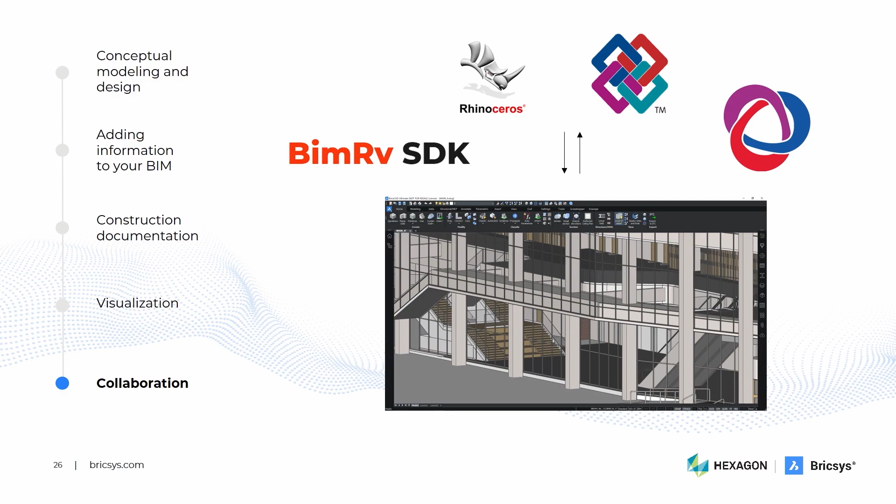With IFC, you can combine different models, an architectural one, structural, MEP model, and so on, coming from different modeling tools, into one federated model, where you can do quality checks, clash detections, and much more. BricsCAD BIM also lets you import IFC files. And what's amazing is that all the building elements are loaded as native objects. So you can not only view them, but edit them just like any other native object. That's what OpenBIM is truly about. No more closed systems, no more closed file formats. BricsCAD BIM is even IFC certified, which guarantees the quality and reliability of the workflow.

But that's not all. In a typical BIM project, you also want to communicate efficiently on issues, change requests, and so on. From now on, you can do that with BCF, the BIM collaboration format. No more back and forth emailing trying to describe what the exact issue is. No, BCF lets you immediately zoom in on the exact location where the issue is, shows you who needs to resolve it and how urgent it is. We already supported multiple BCF platforms, and now we can add BIMtrack to that list. By fully supporting the OpenBIM approach and continuously improving both IFC and BCF support, BricsCAD makes collaboration easier than ever.

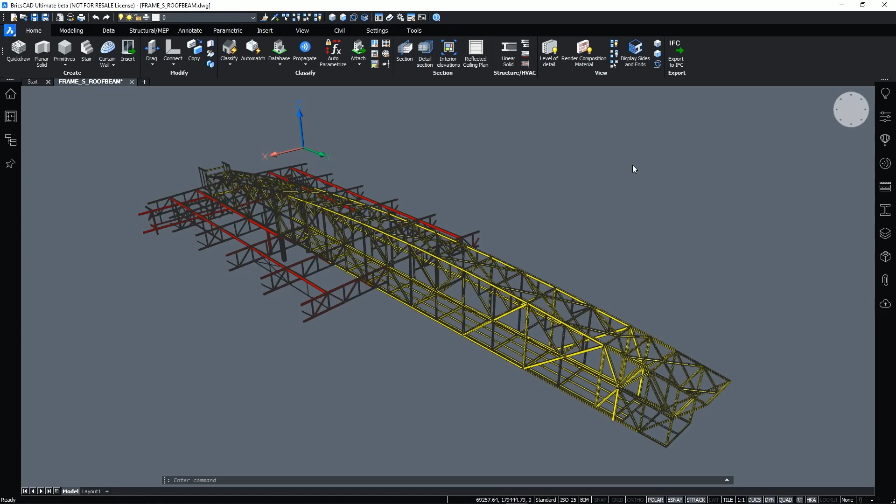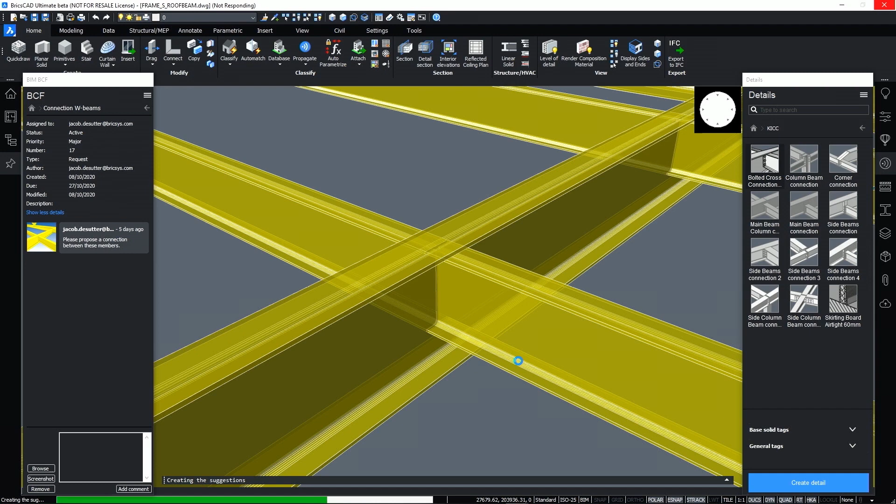To resolve the issue, we will propagate a detail from the Details panel. We have prepared a detail up front for a connection between steel beams with a plate and a couple of fasteners, and after drag and drop of this detail, Propagate will scan the model and it will try to find all the possible applications where this detail can be applied. After this is done, we can ignore or accept these suggestions. And in this case, we will simply accept all the 48 connection details.

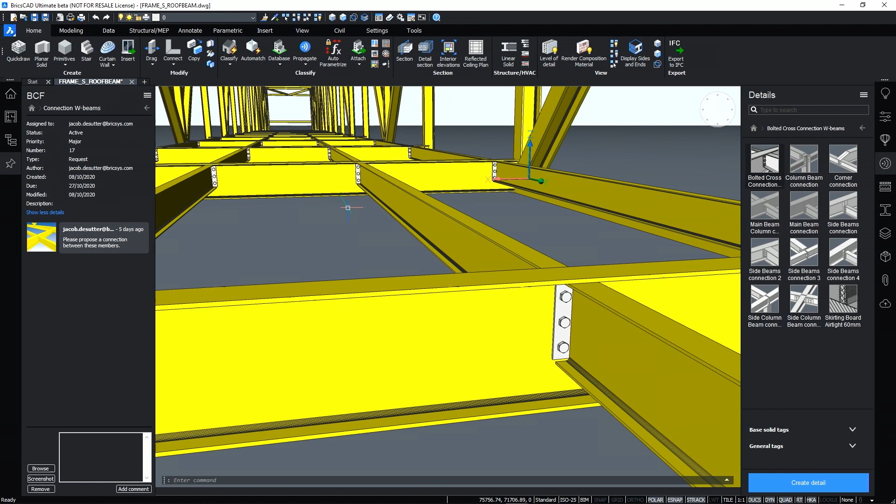So if we zoom in, we can see that the detail has been added and the issue seems to be resolved. So we can add a comment in our Issues panel where we say that this issue has been fixed. We can also add a screenshot and add the comment to the issue.

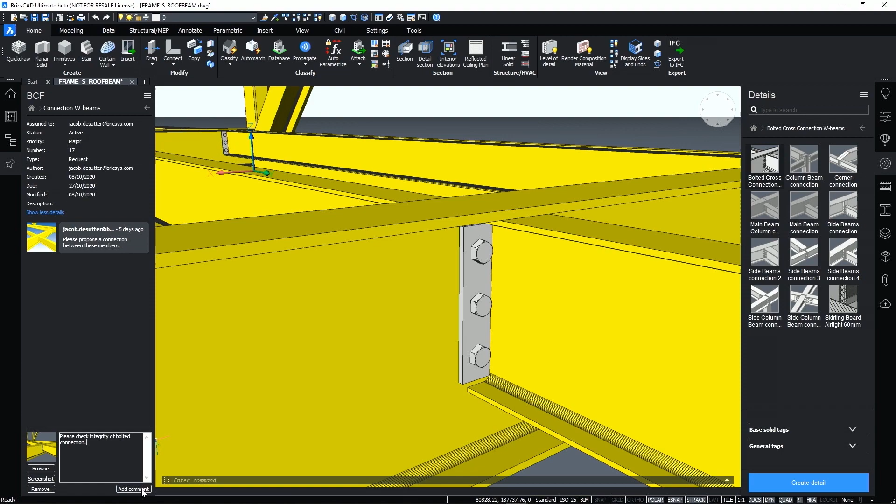A second part of the OpenBIM workflow is working with IFC. In V21, we have worked significantly on performance and stability of IFC import and export, but we also added several new improvements, like import and export mapping. This allows users to map internal BIM types to IFC types, which gives them a lot more control over how entities are exported and imported to IFC. Jacob has now exported this model of the roof structure to IFC. Once this is done, we can open the IFC model in any IFC viewer, for example, in our Bricsys 24/7 common data environment, to see what the IFC model looks like.

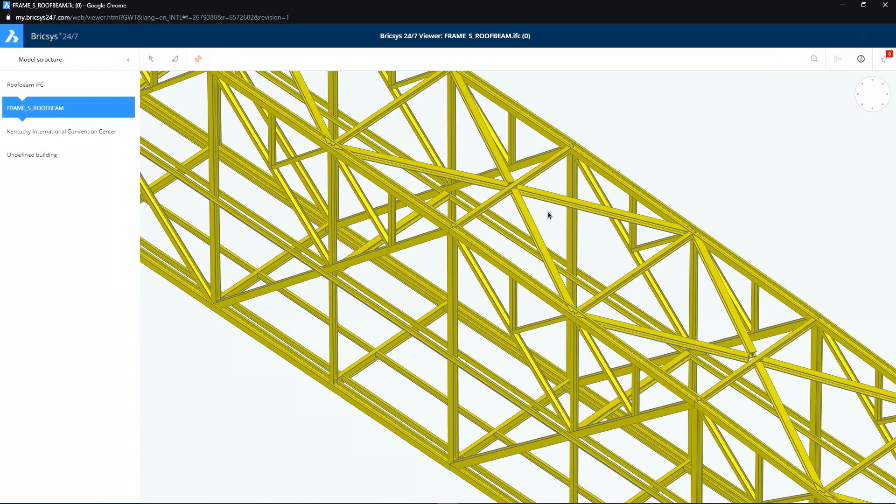In V21, we have also added improved interoperability possibilities with other file formats, including Revit models and Revit families. In order to do this, we work together with the Open Design Alliance, who has built a BIM SDK to support interoperability with different file formats. Neil Peterson, president of the ODA, will now explain the vision of the Open Design Alliance regarding the BIM SDK.

Open Design Alliance is a not-for-profit technology consortium that develops interoperability solutions for the CAD and BIM industries. We partner with buildingSMART International to support open standards such as IFC, and we also provide toolkits for proprietary design formats such as Revit, Navisworks, and DWG. Today, I'd like to highlight our BimRv SDK.

BimRv is a toolkit that provides standalone access to Revit files with no dependencies on the native Revit product. BimRv allows any application to read, import, and visualize complex Revit models. Limited creation support is also available, with full creation support under development. BimRv is a mature solution. It's used by dozens of commercial products, and it's supported by a broad and diverse coalition of BIM software vendors.

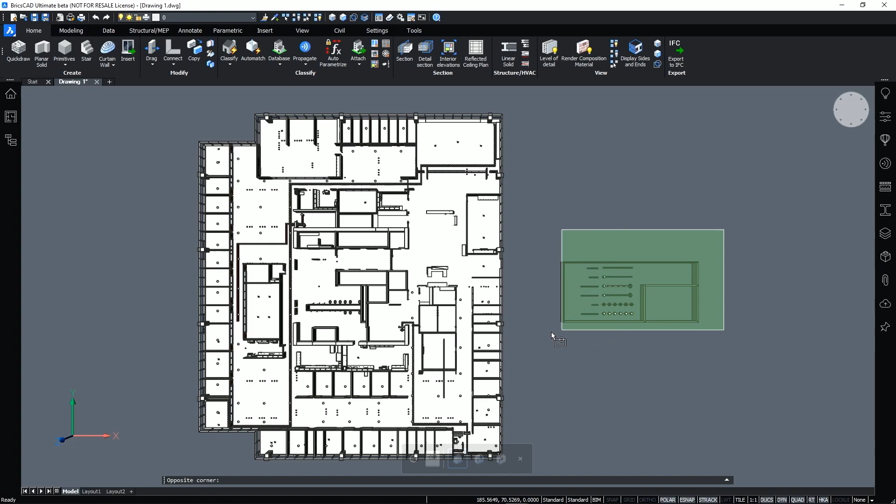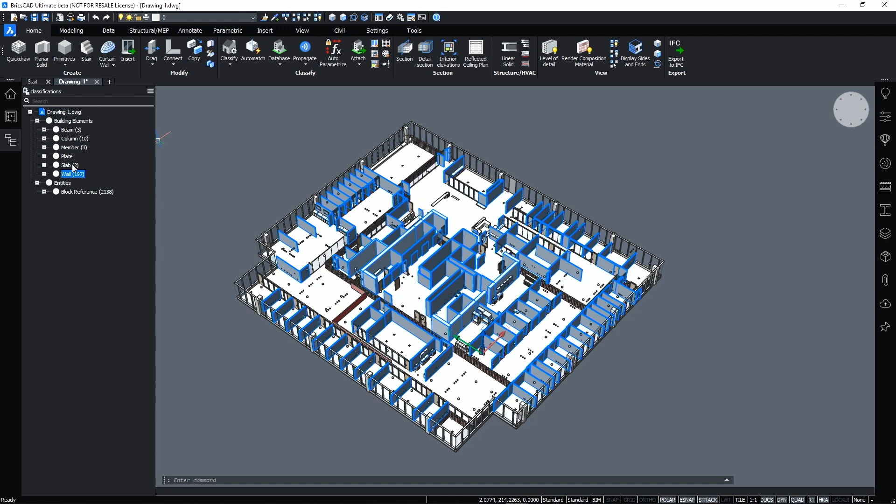In this version, only the geometry is imported, but we can use tools like BIMify to turn this geometric model into a BIM. Once the model has been BIMified, we can use the structure tree, and we can see that different BIM types have been detected. For example, we can isolate the walls here and see that the walls have been detected correctly.

This new RVT functionality enables a workflow where you work together with other stakeholders or teams that work with RVT data. For example, you can imagine that in BricsCAD BIM you can start doing interior layouting by adding office desks and trying out different layout organizations directly on this imported RVT data. But of course, other workflows are also possible. We see that this new RVT import functionality is a complementary workflow to working with open standards like IFC.

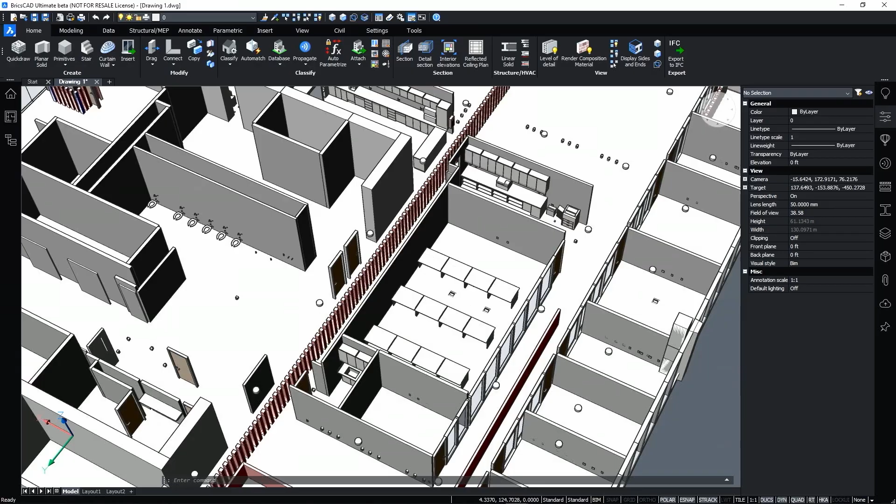Regarding collaboration, a question that we get often is how BricsCAD BIM allows multiple users to work together on the same model at the same time. In V21, we have worked on a multi-user workflow that is based on Git version control and that works directly on DWG. Version control is a system that records changes to files over time so that you can recall specific versions later. It is a proven solution for collaboration well known in other industries like software development.

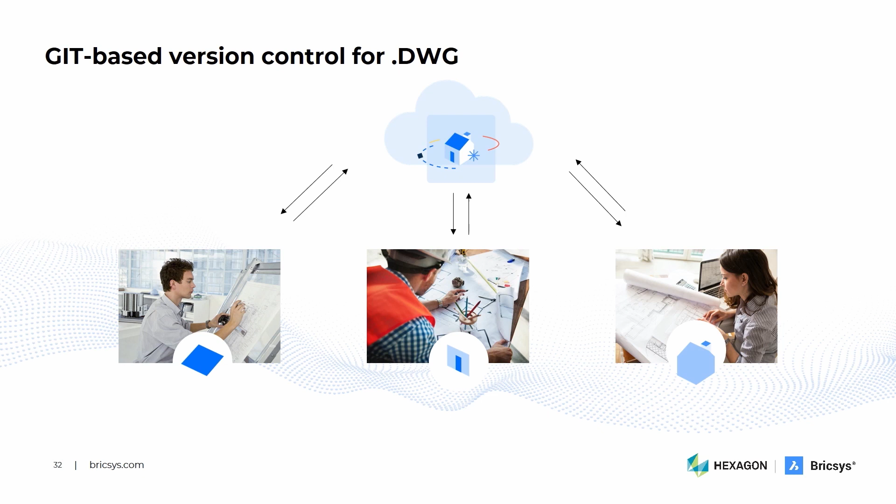It allows architects to collaborate with others across the globe, as every architect can check out files locally from a central server. The advantages are that everyone knows what everyone else is doing, and administrators have full control over who can do what. Also, it allows you to work with smaller models, so there is no need to download the entire model if you only need to make a small adjustment to one specific part. And it allows you to work offline as well as online on multi-user projects, so you don't always need to be connected with the cloud server all the time. This new Git-based version control functionality is now available as a beta functionality in BricsCAD V21.

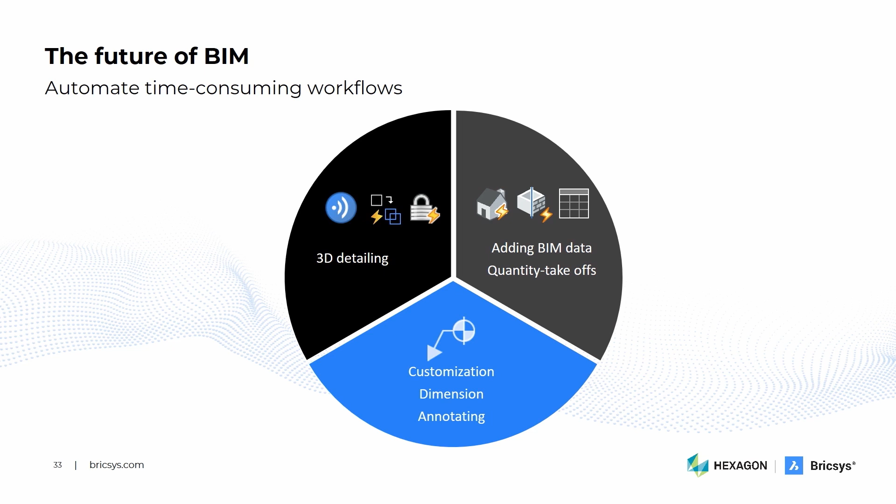In this presentation, we have shown several ways to automate parts of your BIM workflow. In the future, we want to continue to follow this direction and take away the error-prone and time-consuming parts. On the modeling part, we want to make it easier to increase the level of development of your BIM using tools like Propagate and Copy Guided, but also make it very easy and intuitive to do conceptual design. On the BIM part, we want to automate going from a conceptual model to an information-rich BIM model using tools like BIMify and the ability to create quantity takeoffs from your BIM. On the construction drawing part, we want to continue improving automation of dimensioning and annotations on the 2D drawings.